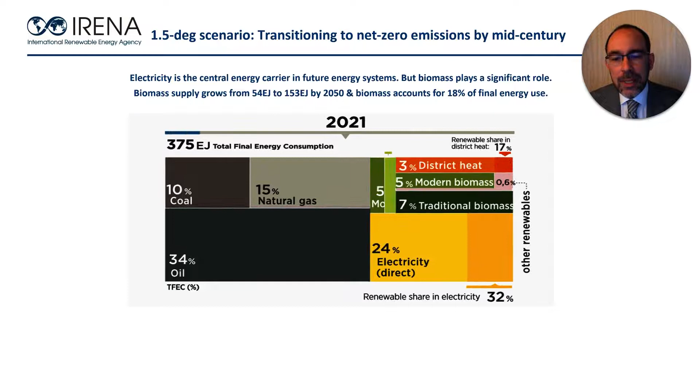Aviation is widely regarded as one of the trickiest sectors to decarbonise. Globally, aviation produced 915 million tonnes of CO2 in 2019, about 2% of total global emissions.

And it was a sector that is expected to grow. Prior to the COVID-induced reductions, annual jet fuel consumption was about 360 billion litres a year, and it was forecast to more than double by 2050.

As other sectors decarbonise fast, aviation will account for a growing share of remaining emissions. And beyond energy use, aviation is also responsible for non-CO2 related impacts on the climate.

The industry is committed to a 50% reduction in CO2 emissions by 2050. But in the context of global net zero targets, a 50% reduction is not ambitious enough. IRENA's 1.5 degree scenario suggests aviation emissions will need to fall by about 90% by 2050.

The optimum mix of solutions to decarbonise aviation is still not clear at this point in time. However, the key building blocks are pretty clear.

As with most sectors, the starting point needs to be to manage demand, both in terms of demand for air travel and the energy demand of that travel, i.e. by improving efficiency of aircraft and of operations.

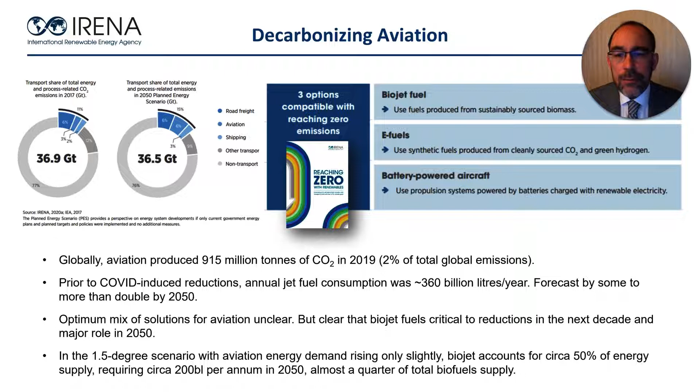So let's talk about biojet. Biojet looks to be the only cost-effective option for partial emission reductions in aviation in the next decade, and it looks likely to play a major role in decarbonisation through to 2050.

Our 1.5 degree scenario assumes that energy demand can be held down so that it only increases slightly by 2050. And within that scenario, biojet fuels provide roughly 50% of final energy demand.

Delivering that level of energy demand would require about 200 billion litres of biojet fuels per annum in 2050.

Next month, as part of a series of deep dive reports on key components of the pathway to zero, we will be publishing the Reaching Zero with Renewables briefing paper on biojet fuels, which explores in depth the current status and future potential of biojet and the actions needed to realise that potential.

Let me give you a few insights from that work, and then I think other presenters will dive a little deeper.

Current biojet production is about 140 million litres per year. And although production has increased significantly, up from 7 million litres in the previous year, commercial volumes remain relatively small, less than 0.04% of current aviation fuel use.

Production is currently limited to 2 plants that routinely supply about 9 airports, and whilst demand is ticking upwards, biojet use is still relatively low. It's typically blended in low ratios with fossil jet fuel, and cumulatively to date, an impressive sounding 315,000 flights have used blended biojet fuels. But that's less than 1% of flights in 2019.

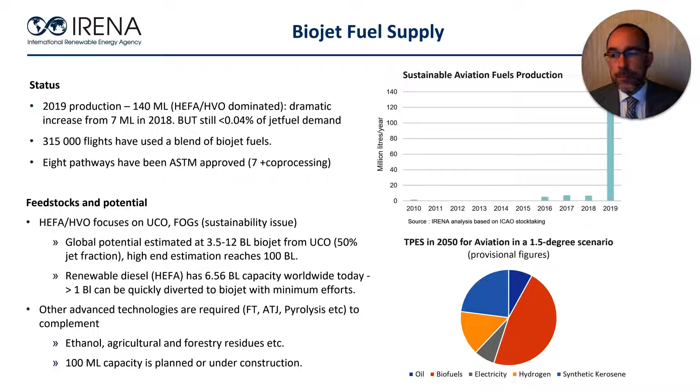Finally, a quick word about costs. Fuels produced by the HEFA HVO route cost around between 3 and 6 times more than conventional jet fuel, and that's mainly due to higher feedstock costs. High capital costs will be an obstacle for some of the other technologies that I mentioned, such as gasification. Our report highlights various strategies focused on that, but the cost disparity will remain for many years to come and will require policy interventions, but is also a powerful driver for innovation.

So in conclusion, as with other parts of the energy system, global goals of deep decarbonisation by 2050 require concerted action this decade. Aviation is one of the sectors where least progress has been made. Biojet has a crucial role to play in addressing that and has significant potential. But we need systemic innovation, including technology innovation in feedstocks and conversion technologies, but going beyond that, where technology innovation goes hand in hand with innovation in supply chains, business models, and the financial and policy incentives. Together, that systemic innovation can greatly increase the future prospects of biojet fuels. Looking forward to the presentations of my colleagues. Many thanks for your attention.

Meeting ASTM specification is extremely important for SAF. Once certified, SAF can be used for blending purpose in aircraft using an airport delivery network.

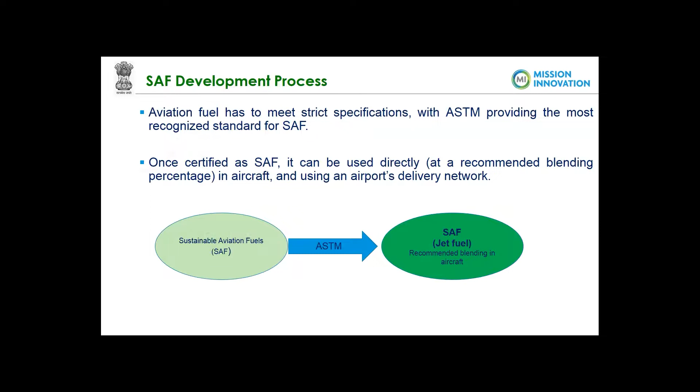Aviation presently contributes 3% of global GHG emissions. A significant increase in the production and consumption of sustainable aviation fuel is required in order to achieve the GHG emission reduction targets proposed by ICAO.

Presently, less than 0.1% of jet fuel is from bio-origin, and 99% of this is hydroprocessed esters of fatty acids. Feedstock plays a very important role. GHG reduction potential differs depending on the raw material used with respect to conventional jet fuel. A concerted effort is required along the value chain, hence it is important that all sectors and concerned ministries work together.

DBT, Ministry of Science and Technology, promotes innovation and RD&D by funding projects, while Ministry of Petroleum and Natural Gas regularly works on policy and implementation aspects. CSIR labs, DBT bioenergy centers, NGOs, institutions like IITs, universities all implement R&D projects. Oil marketing companies produce large SAF quantities from a viable refinery-based technology. The Ministry of Civil Aviation is interested in meeting the forthcoming ICAO regulations for low GHG emissions from the aviation sector.

Sustainable supply of feedstock is the most important part for commercialization of SAF. Currently, used cooking oil is used. About 10% of edible oil is available in India, of volume around 2 million tons per annum. Tree-borne oils have certain challenges on the supply side with respect to yields, harvesting, etc. Hence, the potential feedstock would be short rotation non-edible oilseed crops of the mustard family, for example, Niger, Carinata, camelina, etc.

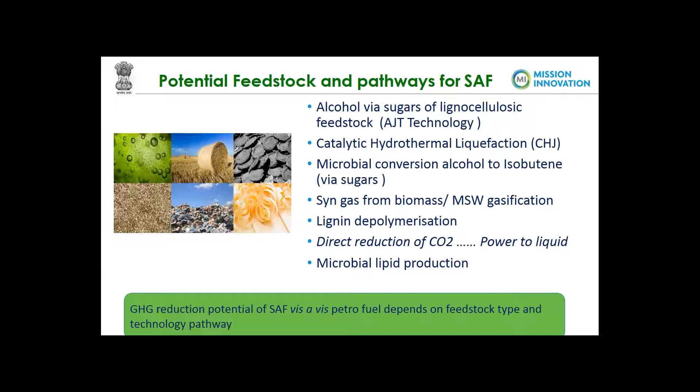Life cycle analysis of these pathways is very important. As mentioned earlier, GHG reduction potential of SAF vis-a-vis petrofuel depends on feedstock type as well as technology pathways.

In power to liquid pathways, there are huge opportunities in India for production of clean liquid fuel using renewable power, hydrogen and carbon dioxide. Various R&D segments are electrolyzer design, catalyst development, carbon dioxide capture, reduction, etc.

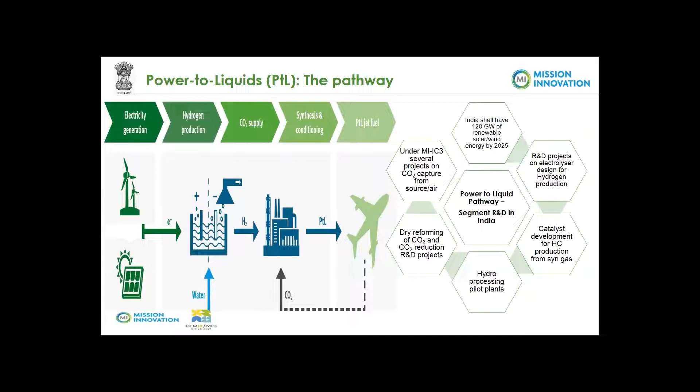Primary objective of ISAF is the need for sustainable feedstock and cost-effective pathways for scalable production of aviation fuel. Hence, through this collaborative platform, it is expected that R&D efforts by members can demonstrate technologies and share knowledge and best practices. Looking forward to closely working with co-lead US and other supporting members.

In conclusion, I would reiterate that scalability and delivered cost are the primary challenges for SAF. Net energy ratio, LCA studies, techno-economic analysis are very important at an early stage. Collaborative efforts are key to speed up technology development, and deep engagement of stakeholders supported by conducive policies and R&D efforts will make a difference. Mission Innovation is a uniquely placed opportunity to undertake this challenge.

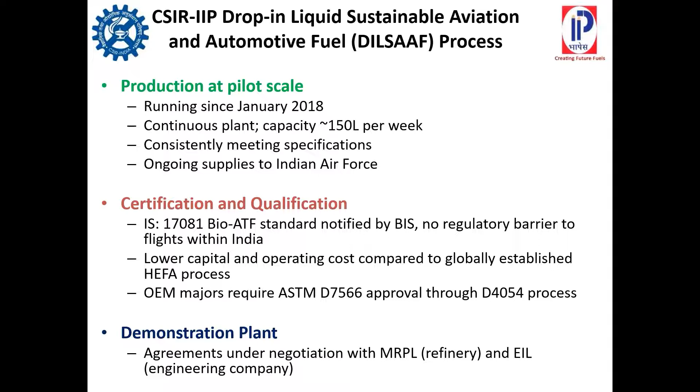We are currently in discussions with a refinery major as well as an engineering major to build a demonstration plant of about 15 tons per day. This is also required for the qualification of the fuel through the ASTM D4054 process. We plan to use feedstocks which are available abundantly today, like used cooking oil and palm stearin, but also tree-borne oils and rotation crops and futuristic feedstocks that we believe can be brought to scale in India through the supply chain aspects of the research.

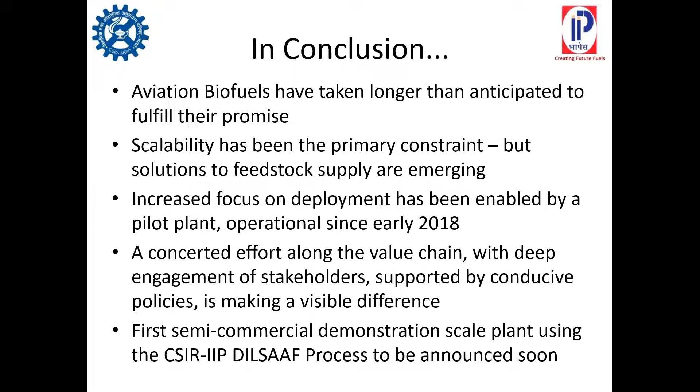Aviation biofuels have taken longer than we hoped to reach where we have reached, but we think we will get there soon enough, propelled by international activities like CORSIA and with concerted efforts along the value chain, with deep engagement of stakeholders and policymakers and passionate researchers like we have on our campus. We hope that our future will be sustainable and that we will be able to give back more to nature than we have taken from it all these days. Thank you.

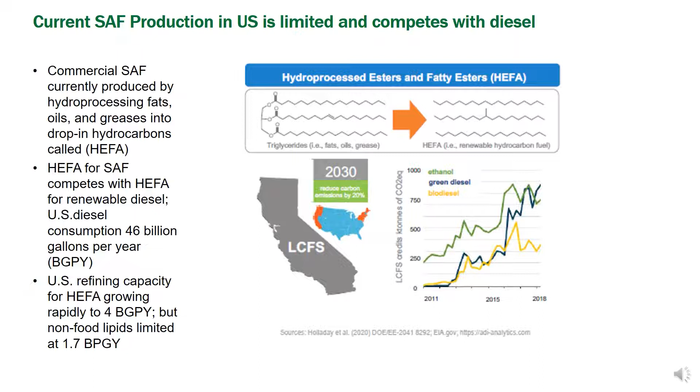HEFA refining capacity in the US is growing, but those processes that rely on waste fats, oils, and greases will be constrained by supply chain limitations of waste FOG.

The US airline industry has made significant commitments to net zero carbon emissions by 2050. As part of that commitment, they've pledged to work with governments and other stakeholders to rapidly expand production and deployment of SAF in the US, with a goal of making 2 billion gallons of SAF available by 2030.

There's also proposed legislation in the United States to incentivize the production of SAF. Currently under negotiation are blenders tax credits, investment tax credits, and other grant programs.

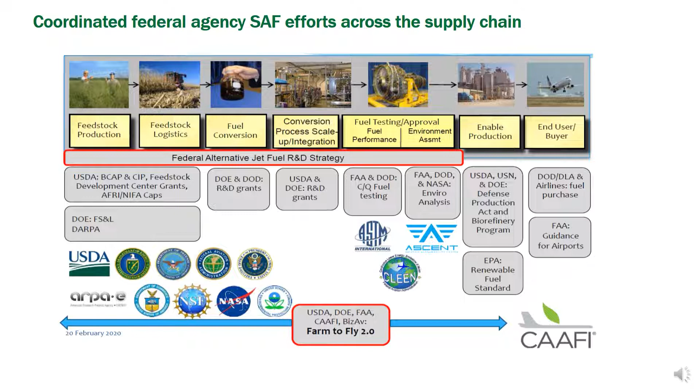BETO has conducted several workshops that focused on understanding the technologies available for scalable production, their economic competitiveness, their environmental benefits, and the supply chains for feedstocks that would enable biojet fuel deployment. These workshops have informed our current investments in SAF.

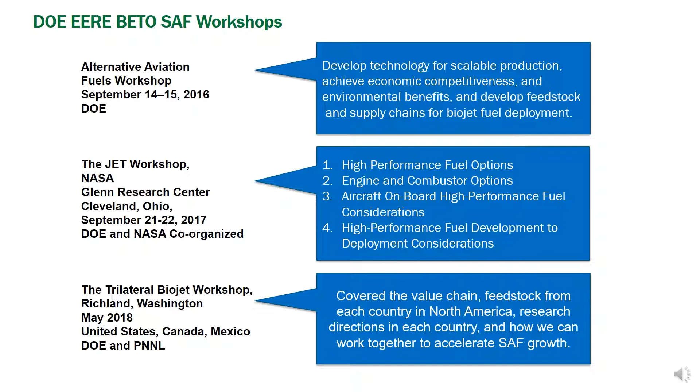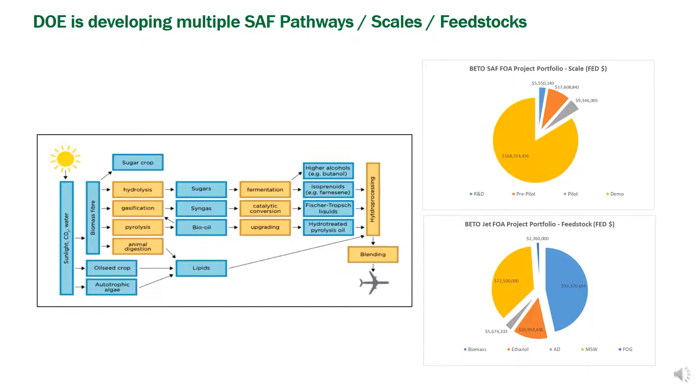In fiscal year 21, BETO announced a funding opportunity announcement for $31 million to focus on the development and demonstration of low-carbon biofuels for aviation, marine, and heavy-duty markets. Those technologies must deliver a 70% greenhouse gas emissions reduction, and they're available for technologies at various scales, from pre-pilot unit operations through demonstration scale facilities.

Thank you for your attention. I look forward to joining India as co-leads for IC4, the Innovations for Sustainable Aviation Fuel. We look forward to working with other member countries and stakeholders on growing the sustainable aviation fuel supply and markets. Thank you so much for your attention.

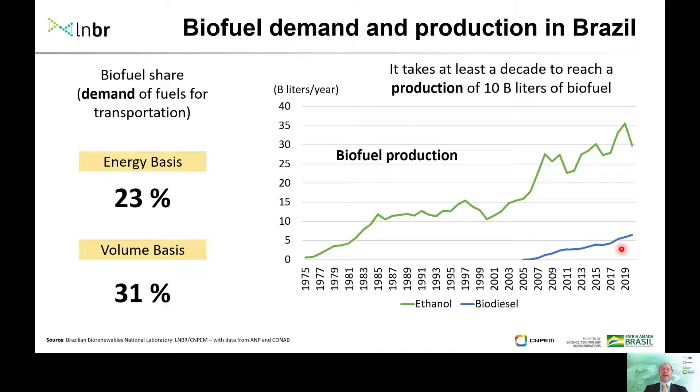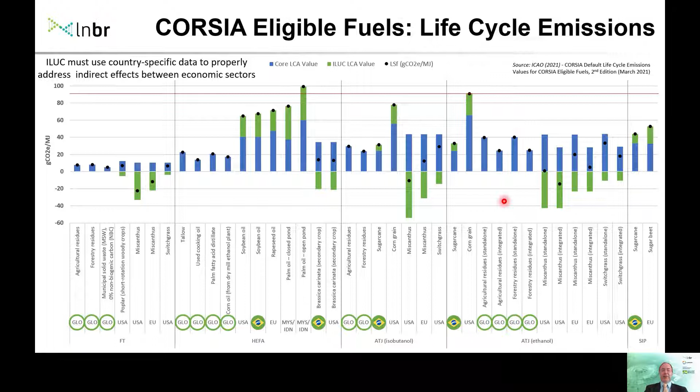Note that they don't have green bars because they mostly depend on residues. We have a large project in the nation trying to address that - a consortium called BioValue that involves 11 universities and research centers, and also partners from industry, aviation, oil and gas, and pulp and paper sectors. This is a Horizon 2020 project with a sister project in Europe called BECOOL, which among other things is trying to integrate biochemical and thermochemical routes into typical biomass-to-liquid strategies.

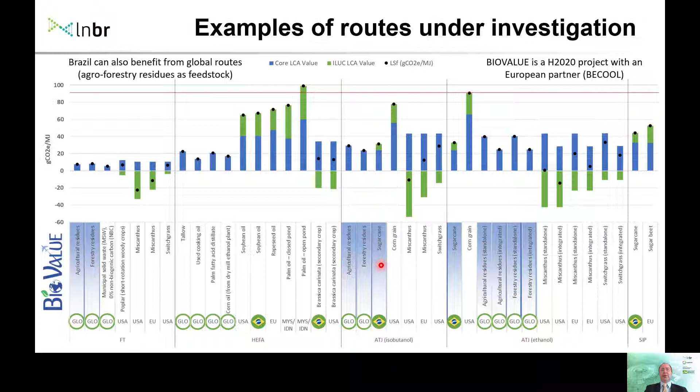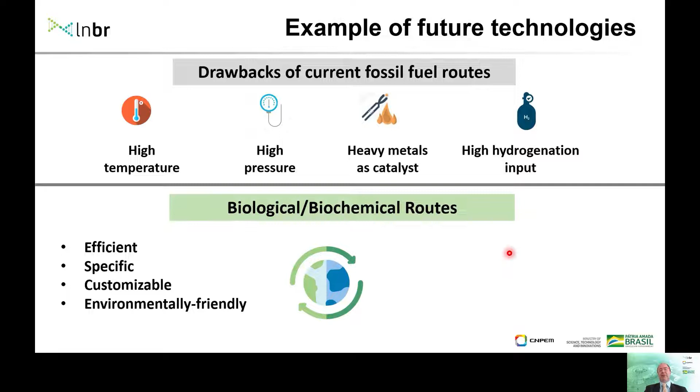An outlook for the future: we think we should not discard technologies. On the contrary, we should explore as many as possible. We know the drawbacks from fossil fuel routes - high temperatures and pressures, heavy metals, and high hydrogenation inputs. We think biochemical routes have the opportunity to be more efficient, specific, customizable, and environmentally friendly. This is a potential area for international collaboration as well.

In summary, I believe it will take at least a decade of continuous R&D and country-specific policies so that we can have biojet fuel at a reasonable production scale in Brazil. That R&D should be accompanied by scaling up capabilities, and we should not discard but rather consider different types of technologies and routes. Finally, continuous financial support is necessary so that we can foster partnerships between industry and research centers, and international collaboration.

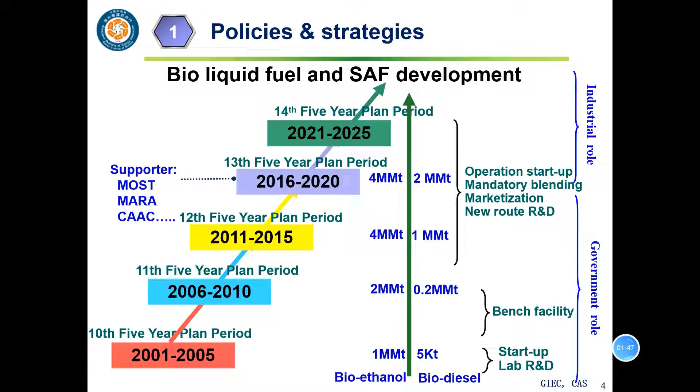According to CAAC's policies, by 2035 the concept of green development will be deeply rooted in the whole industry. The Green Development Policy System, Standard System, and Assessment System will be mature and complete. The green management level will be greatly improved. To achieve these green aviation goals,

China will further implement the carbon emission trading mechanism, introduce more active social support policies, encourage aircraft to use more alternative fuels and additives, and promote SAF airworthiness certification.

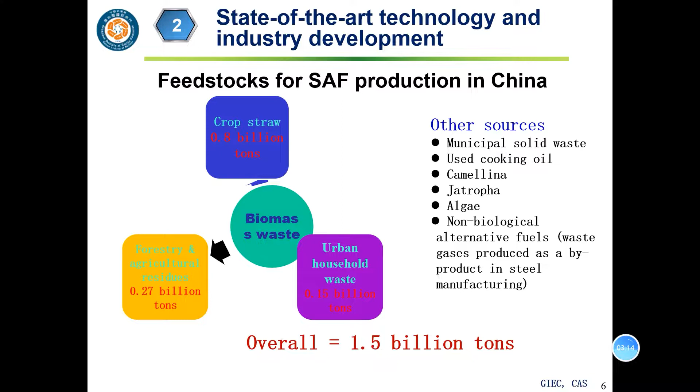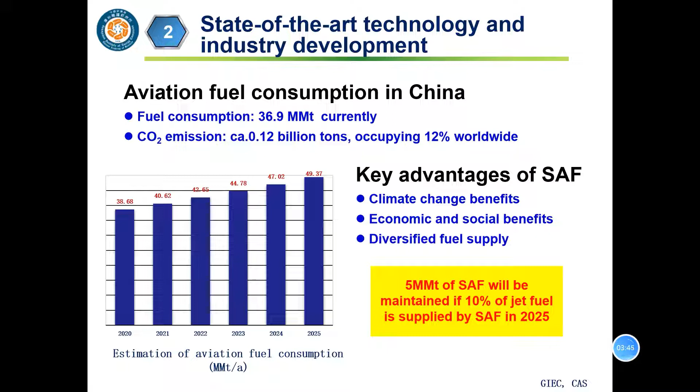Currently, the annual aviation fuel consumption in China is about 36.9 million tons per year by airlines. As to SAF, the expected demand will be 5 million tons per year if 10% of jet fuel is supplied by SAF in 2025. Therefore, the development of SAF will bring great advantages to sustainable development goals in various aspects.

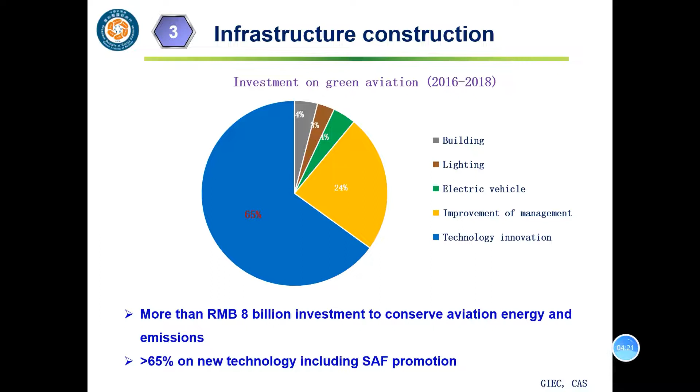Over the past 5 years, remarkable achievements were made in the construction of aviation infrastructure. Let me take the total investment from 2016 to 2018 as an example. More than 8 billion yuan of investment was used to conserve aviation energy and reduce carbon emissions. 65% of the investment is in the field of technology innovation, including the promotion of SAF R&D.

More concretely, these promotion measures are reflected in the following aspects: 1. Purchase agreements with SAF suppliers. 2. Investment and significant start-up support for SAF projects. 3. Pioneer airports with regular SAF supplies, and support for testing flights with SAF.

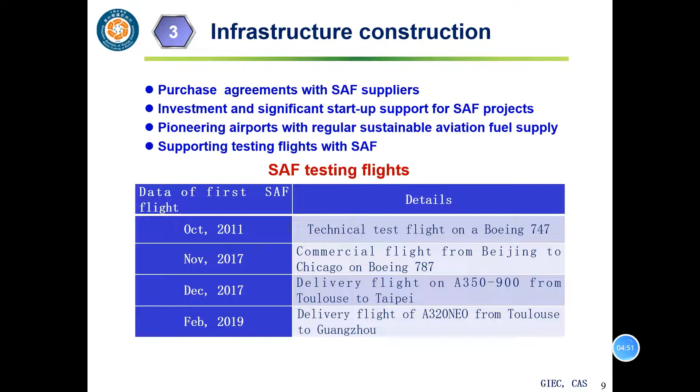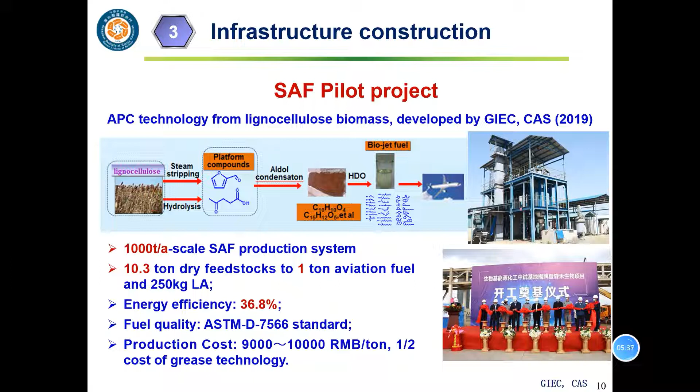In addition, large-scale SAF pilot construction has been highly concerned and supported by several national departments in China, including MOST, MOA, and others. The R&D of APC technology from lignocellulose biomass, led by our institute, has achieved great success, and 1,000 ton per year demonstration projects are under construction. The system energy efficiency can reach 36.8%, and the fuel quality meets the ASTM D7566 standard. The production cost is about 9,000 to 10,000 yuan per ton, which is half the cost of grease technology.

As a conclusion, to tackle climate change and international regulation of aviation emissions, the following aspects we will enforce in the next step: 1. Improve the middle and long action plan for SAF development. 2. Take primary responsibility by airports and airlines. 3. Attract private investment and improve the policy system. 4. Intensify the integrated industry chain. 5. Enhance international communication and cooperation. That's all, thanks.

Thank you for this opportunity to present the Danish roadmap to sustainable fuels. My name is Lasse Rosendahl. I'm the head of the Department of Energy Technology at Aalborg University in Denmark.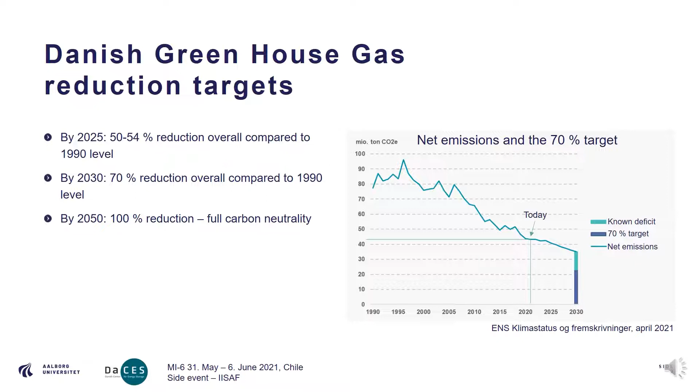The Danish greenhouse gas reduction targets follow 3 levels: in 2025, 50 to 54% reduction; in 2030, 70% reduction; and by 2050, full carbon neutrality is envisaged in our emission profile. You can see in the graph to the right that as we go towards 2030, the 70% target lies a bit beyond what we can bring about by known technologies already today. So there is obviously a research challenge for us to reach the 70% target in only 9 years.

The way the Danish government has gone about this is to set up 4 green missions: one on carbon capture, storage and use, one on green fuels, one on sustainable agriculture, and one on recycling and reduction of plastic waste. In the Danish Center for Energy Storage, we've coordinated a draft roadmap for the green fuel mission based on inputs from more than 100 stakeholders.

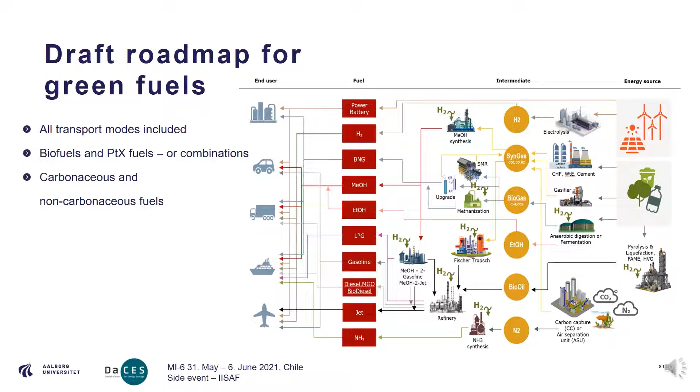The essence of this roadmap is obviously, as a roadmap focusing on the entire transport sector, it's quite diverse, so it has a number of energy sources, intermediate energy carriers and technologies before we get to a wide range of final products. It's across all transport modes, both biofuels and power-to-X and combinations, carbonaceous and non-carbonaceous fuels—a very diverse pathway leading towards a range of sustainable transport fuels in the future. If we focus on jet fuel, it's a little less crowded.

So back to this comment that we have not only pure biofuels, but also the combination of green carbon from biomass and green hydrogen from a power-to-X implementation. In Denmark, we are predominantly looking at gasification to form a syngas, followed by either Fischer-Tropsch or other types of synthesis; biogas, where subsequently we create a syngas and then go through methanol to create jet fuel; and then bio-oils, either pyrolysis or hydrothermal liquefaction, that are then refined to produce kerosene. So we have these different types of technologies in scope.

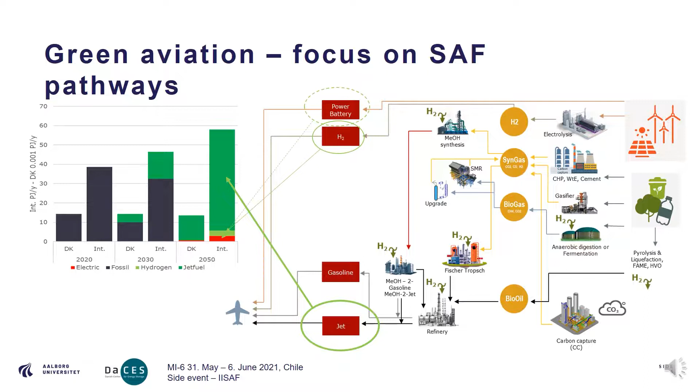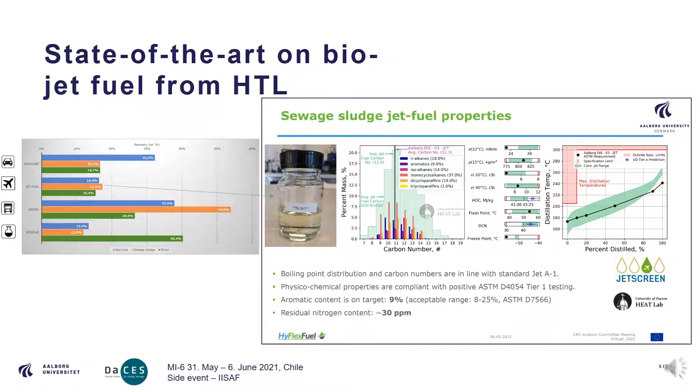So to sum up, in terms of the Danish ambitions, based on the roadmaps that were produced here in the spring, delivered on May 12th, there will be a call to distribute 100 million euros onto these 4 green missions. This call will open in August, and there'll be a decision in December 21 as to which activities we'll go forward with. As I said earlier on, there'll be a focus on near-term implementation and longer-term research targets.

In terms of Danish strongholds, it's distributed across different technologies, either liquefaction technologies to produce an oil and then refine it to a jet fuel. An example of an ongoing project is the Low Carb Fuels Project that focuses on this. We have gasification and Fischer-Tropsch as a pathway, and then based on the very large biogas stronghold in Denmark, via methanol and CO2 to produce a jet fuel. So this is the range of technologies that we'll be focusing on.

One further thing in terms of Danish competences is sector coupling, understanding how to link these green fuel technologies with, for example, the carbon capture activities, but also sustainable agriculture, and to exploit the links across different energy vectors, so to really make an efficient integration.

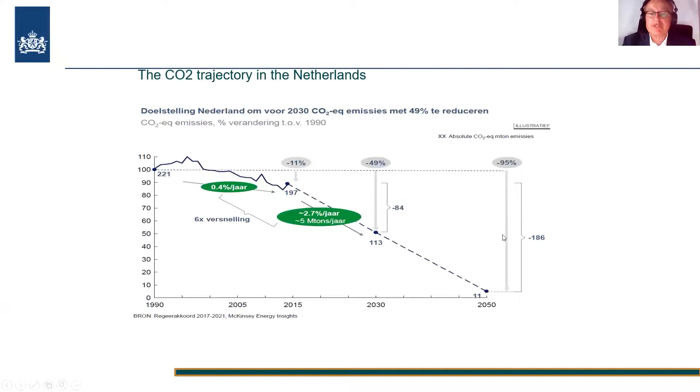Aviation fuels in the Netherlands are important because the Netherlands is looking for a major greenhouse gas reduction. In 2050, we aim to achieve 0 greenhouse gas emissions, and 4 years ago a climate agreement was formulated to realize 49% reduction already by 2030. This, because of the Green Deal in Europe, will go up to 55% very soon.

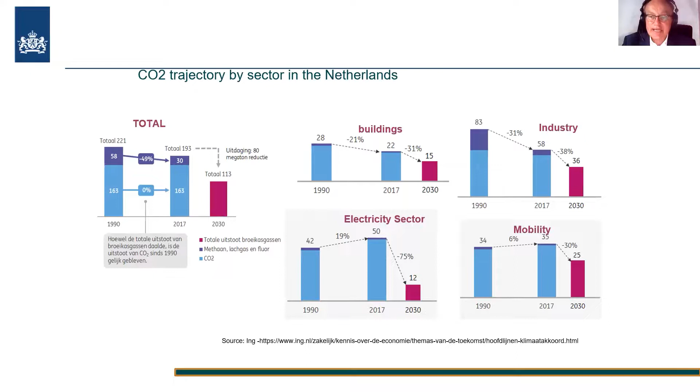So the total emission from the Netherlands has to be reduced. It's about buildings, electricity, the industry sector, and also mobility. For all these sectors we have developed plans and they are being implemented right now.

However, if you look here, you can see that in the mobility sector we have introduced biofuels. At this moment we have an increased amount of biofuels, it's gone up to about 5%, and it's now even higher in the Netherlands. We mainly use ethanol to replace petrol. We use some biogas, and also a little bit of HVO, but it's mainly FAME that is used to produce the diesel. So all these different biofuels play a role.

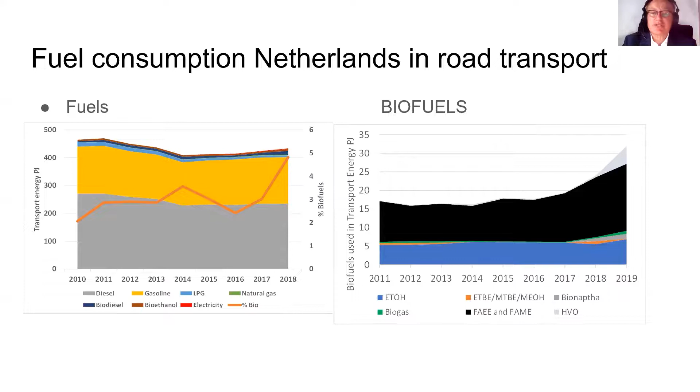But of course we are now also asking ourselves, this is in road transport, but what can we do in aviation? For aviation we have formulated an action program on aviation fuels, and in this program we have formulated a goal for 2030 of 14% sustainable aviation fuels.

We think that up to the year 2030 we will mainly work with HEFA, but we will also develop new fuels, advanced biofuels, advanced aviation fuels that can be used and approved by ASTM. So all these new fuels will play a role.

Recently we developed a European high-level conference on sustainable aviation fuels, where you can hear our minister and other ministers talk about this ambition and what needs to be done. In Europe we are very serious about this 14% greenhouse gas reduction in the aviation sector, going up to at least 50% by 2050. But we need innovation to make this happen.

Up till now in the Netherlands we have had a system called the transport support. But this year, in 2021, we will have two new calls. There is one specific call for aviation and marine biofuels, which I will explain more about later. But also as a follow-up of the climate agreement, we have a national call for the mobility sector, with a lot of money involved, 150 million euro.

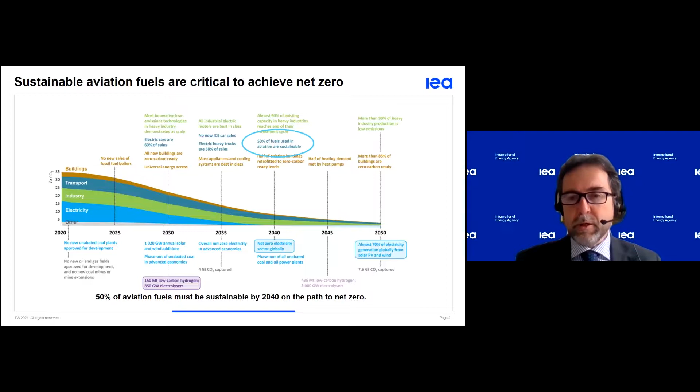Sustainable aviation fuels is one such important technology pathway. According to our analysis, half of the fuels used in aviation must come from sustainable sources by 2040. This is a huge increase from the 0.1% of today.

Now, over time, biofuels actually shift to aviation. They have to triple in transport, going up to 11% of total transport energy demand by 2030, and then further to 14% by 2050, even as electric vehicles and hydrogen expand.

Today, nearly all liquid biofuels are used in road transport, and we expect that to continue to expand to 2030. However, in the longer term, as alternatives such as electric and hydrogen vehicles displace some combustion vehicles, liquid biofuels shift to aviation, which has fewer alternatives, reaching 55% of the total by 2050.

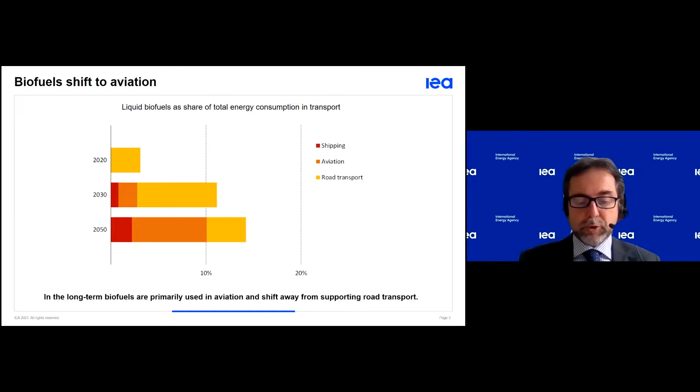For sustainable aviation fuels to play this role in net zero, they must start production at scale in this decade and then continue to expand to 2050.

Now, if you compare the different uses in transport, sustainable aviation fuels have the smallest share of mature technologies. Most of the technologies are in the prototype or demonstration phase, and this includes many sustainable aviation fuels technology pathways. Some biofuels in the form of biojet are just entering the market uptake phase today, but many other technologies need to be demonstrated and then scaled, and this is the important topic of the proposed innovation challenge.

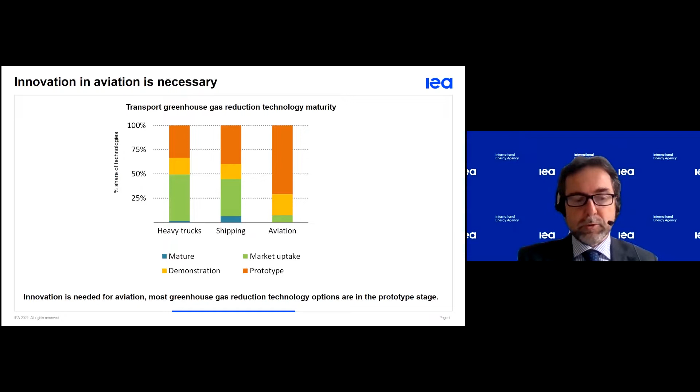Now, looking more carefully at advanced biofuels, this is one important path with which the world can expand bioenergy at scale while minimizing the impacts on the environment. Today, most liquid biofuels come from conventional ethanol and biodiesel, with a large share produced from crops like corn, sugar, wheat, and soybeans. Over the coming decade, advanced biofuels that have both low carbon intensity and don't compete with food or forest land use grow considerably.

Succeeding in this challenge means taking bold but affordable steps. In 2030, 15% of aviation fuel comes from sustainable sources, almost all from biojet. In 2050, 75% of total fuel consumption comes from sustainable fuels, 45% from biojet, and an additional 30% from hydrogen.